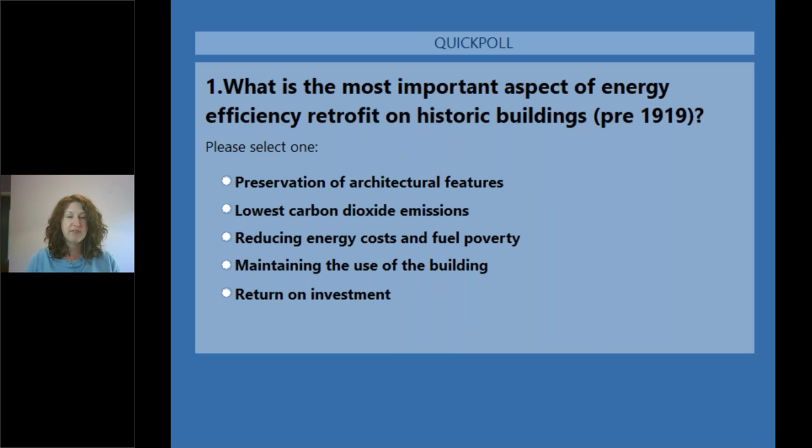Quite a split there. Preservation of architectural features is the highest there, maintaining the use of the building. And then reducing energy costs and fuel poverty, and return on investment is low. That's an interesting one to see there. I think that's something that depends very much on who's asking that question. So thank you for that there.

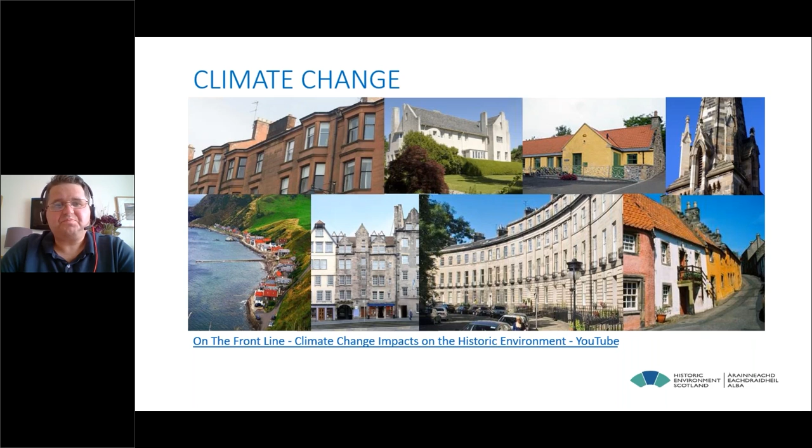Now, it's not just historic buildings or coastal sites that are affected by the threat of climate change. The entire built environment is too. The buildings we all own and live in, they're at risk. Buildings built today will deteriorate more quickly, and they'll require more frequent maintenance as our climate changes. So there is a need to make buildings more resilient in the face of this threat.

So it really brings us to why we're here today, and it's something that Lindsay probably touched on better than I am. We're talking about the need to repair, restore and retrofit our existing building stock. Now, Scottish Government have pledged a net zero target of greenhouse gas emissions by 2045. Now think about that, that's only 24 years away. So in 24 years, Scotland will or should be net zero, which means we won't be a net contributor to global CO2 emissions, which is great. But that's a big ask.

There are 2.3 million dwellings in Scotland, of which 455,000 or so, 19% you may say, were built before 1919. Now we refer to these as being traditionally constructed buildings. But this 19%, they've always been considered difficult to adapt, difficult to treat, and difficult to heat. But there's an urgent need to ensure that these existing buildings are part of the net zero solution and discussion. So now if we look at those 455,000 buildings, many of them are tenements, houses, flats, and retrofitting even a quarter of these buildings over the next 24 years will be a huge challenge.

Even if the financial resource was available to do it all now, there simply isn't the skills or physical resources available to do it at present levels. So I personally feel that this will become a huge growth sector in the next 25 years. And there is a big challenge in terms of ensuring the skills are available at both the professional and construction craft level. There needs to be a lot of upskilling, and retrofitting existing buildings needs to play a much bigger role in our education and training going forward if we are to realise net zero ambitions by 2045.

But before we go off and set about retrofitting 450,000 buildings, we must ensure that the external fabric of these existing buildings is in suitable condition to allow that retrofit to take place. Good maintenance is a prerequisite of energy efficiency.

Now, this is an image that, if any of you have been on a HES talk by Roger Curtis or Moses Jenkins within Historic Environment Scotland, you'll have seen many times before. The left-hand side of the image shows some of the potential issues that occur when a building is poorly maintained. And on the right, there are numerous interventions or repairs outlined to ensure that the fabric of the building is working. You can look at that in a bit more detail when you get more time.

But maintaining and repairing your building is probably the single most important thing you can do to improve its energy efficiency, and it should be a priority before any other improvements are considered. Buildings are more energy efficient when they are kept well. Loose, defective pointing, poorly maintained windows, damp masonry, these all reduce the thermal performance of the building fabric, contribute to heat loss and result in increased energy costs.

So historically, for our predecessors, maintenance of internal and external finishes was assumed. It was a part of living and working in a traditional building, I suppose. But is this incompatible with modern day living? Who has the time or money to keep on top of maintaining their property? It's a big ask, particularly when there are so many modern day distractions.

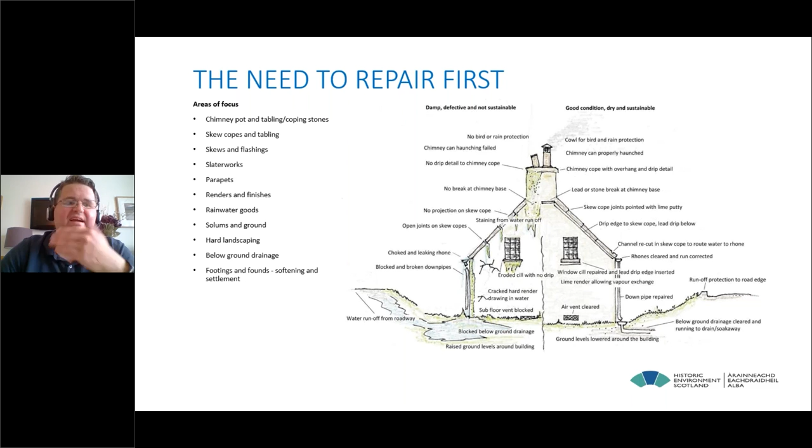So the takeaway from the talk today is to ensure that you deal with these issues before any thermal upgrading of the fabric takes place. Repairing and restoring the envelope is the first step in any retrofit project. And we'll just start by going down the areas of focus on the list on the left-hand side.

So chimneys. Chimneys are generally the most exposed element of a building, and by their nature they're typically hard to access. Consequently, they're often neglected. Not only are chimneys exposed to wind and rain, but flue gases and combustion products deposited within the masonry over decades can accelerate the decay of the stonework or the brickwork. And this is exacerbated particularly if the flues are no longer in use. Now, with the chimney cans, if you look at the image on the left-hand side, you'll see that the haunching washes out, it becomes cracked, pots become loose. This is not only dangerous, but it's something that probably needs to be fixed fairly urgently.

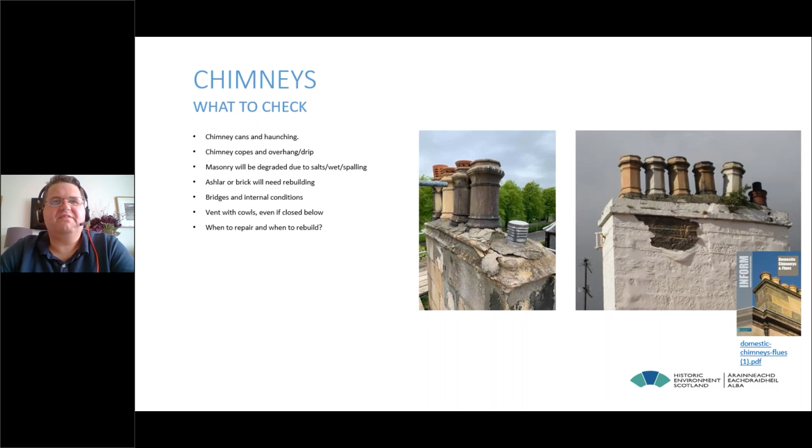You walk around Edinburgh and look up at some of these chimneys, and you just know from looking at them whether they're in a particularly great condition or not. You can see bits where things are growing out of them. So an important thing to look out for is the chimney copes. Is there enough of an overhang or drip? Is the masonry degraded due to salts, wetness, spalling? Does it need rebuilding? In any case, it's likely a chimney will need rebuilt every 100 years or so, but it's a problem area, and this is really the first thing when you approach a building, looking from the top down.

As we come down the building, you'll see things like skew copes. These also face a high level of exposure. They're hard to access, defects can go unnoticed, and if left unattended, these can often become critical. These are there to protect the head of the wall. And if these don't work, they can lead to progressive saturation of the gables, resulting in damage to the interiors as well as the exterior. This also has a big impact on the thermal performance of the building. As we mentioned earlier, if the wall is wet, it's not going to perform as well thermally.

So there's a number of measures outlined there that can be used. You can cloak or half cloak the skew cope. That's an option, but in my opinion it does detract from the appearance slightly. In some cases, the skew copes can be rebedded onto a lead damp-proof course, which provides extra protection against water ingress. If this approach is taken, the copes will need to be secured in place with additional fixings to avoid slippage, and the edges of the damp-proof courses should extend out by about 2 inches or so, just to give a good drip to shed water. But in many cases, just a good margin and a drip detail to shed the water is enough, and that's probably a preferable solution.

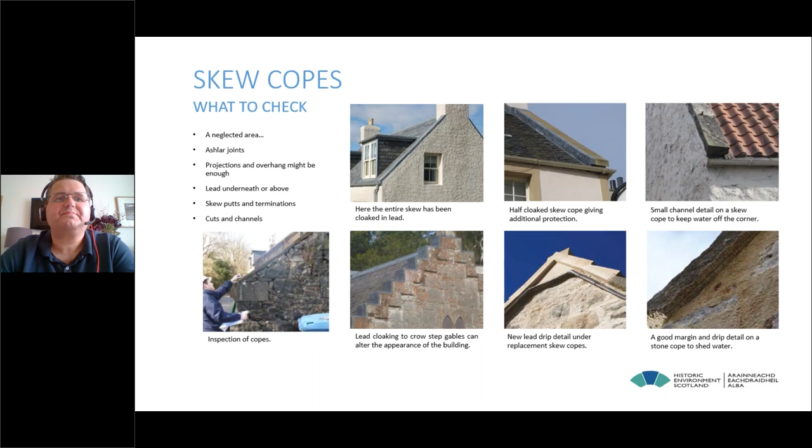And then we sort of come on to these parts of buildings, the parapet gutters. Now, these are a great trap for debris to build up. They're tricky to detail, and they do need a wee bit of thought. These can cause massive problems if left alone. So it's really important to regularly inspect them, clear them out.

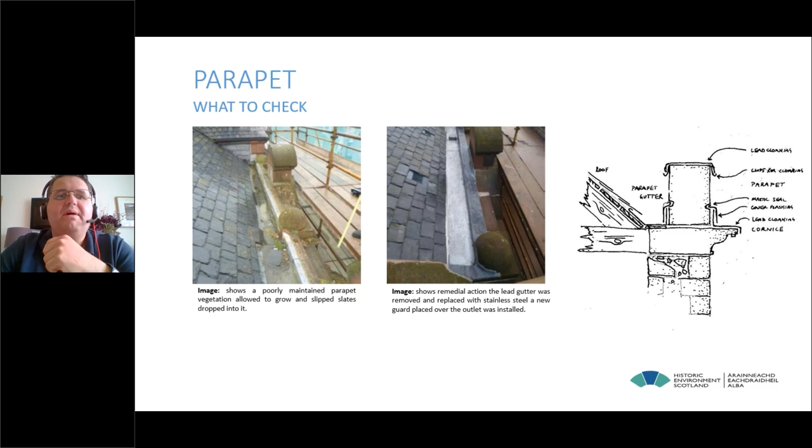So you see on the left-hand side, the image, there's ponding, there's a slate sitting in the gutter. It's clearly not been looked after for a while. Now, the intervention on the right-hand side was to install a new stainless steel gutter. The lead work was carried over the parapet, and a bird guard was installed over the outlet to stop debris falling down the pipe. But that's the repair of it sorted. But if it's not looked after, these problems will come back again.

Sort of moving down the building, we're onto roofs where many Scottish buildings have got roofs that are covered in a local stone or slate. Now, these small, thick Scottish slates were produced from a range of local quarries across Scotland. The material was processed and produced in a variety of lengths and widths, and it was laid in diminishing courses, with the largest slates at the bottom of the roof, diminishing to smaller slates towards the top.

Now, slates have got a finite life, but we know that this is a really robust material. The material will last for well over 100 years, which is quite common, but depending on the type of slate and the quality of fixings and how the material has been laid. So we really are reliant on the craftspeople to help us understand these roofs. But similarly, regular repair is the best way to ensure that roof coverings will remain watertight and continue to perform well.

So what you really want to be checking is damaged, loose, missing slates. The amount of water that can enter by a single missing slate is fairly limited, but it's the local decay of the sarking board that will follow that will lead to further loss of slates. So generally an annual inspection and repair is sufficient. Other things to do is just check the flashings are clear of debris, valley gutters and things like that. There's no bits of slate or cement in there.

Go into the roof space, check the fixings. Are they in good condition? Is there condensation on them? Is there moisture in the back of the sarking? Check for leaks in the roof. It may not be obvious from looking outside where there's problems, but if you go into the roof space, you'll get a better idea.

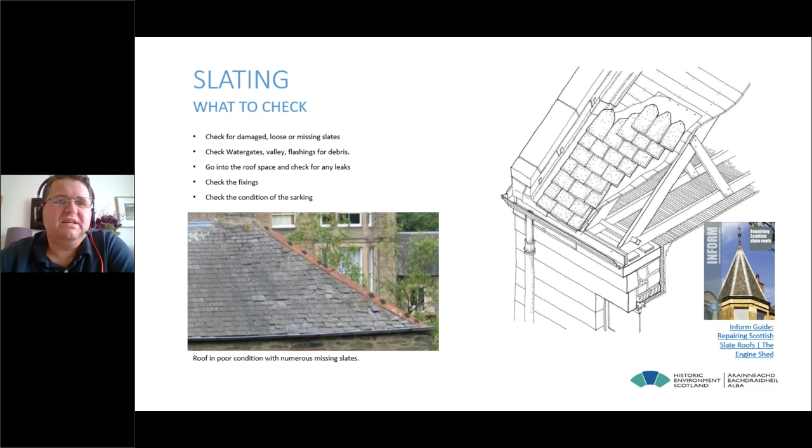And it simply just does come to a point. You'll see from the image there where there's quite a number of missing slates, and you might find that fixing these individual slates is no longer cost effective, so reslating may be required. Now, as a general rule, if you're talking more than 20-25% of slates are cracked, broken or missing, it may be more practical to just strip and re-roof the building. And I would suggest using an NFRC approved roofing contractor if you're going to go down this route.

But there's something quite beautiful about a slate roof. I much prefer the lively tones of a traditional Scottish roof than the modern homogeneous roofing slates that we are importing today. We've got plenty of these roofs around, but they are being lost at a fairly substantial rate. The material hasn't been produced in Scotland since the 1960s, so we are relying on imported material, which to me just doesn't have the same appearance. It's not quite as rough or as lively.

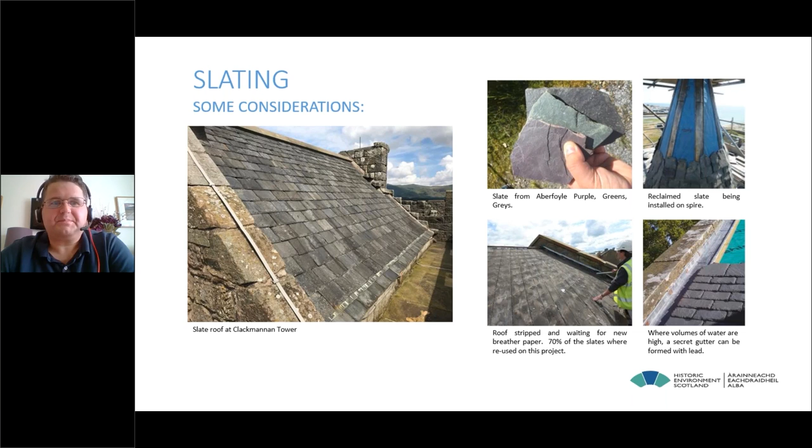So for us, the best way to maintain and preserve these roofs is just regular maintenance, again, a sort of annual one. You just go up and have a look at your roof through binoculars, and just sort of bring somebody out to repair it.

We get on to roans and gutters, and these are a really important part of the building because they're the thing that carries rainwater from the roof, ensuring that the wall fabric remains dry. If they get blocked, they can cause a huge amount of problems with high volumes of water saturating the building fabric. This is a serious matter - if not addressed promptly, it will result in damage to the masonry and finishes.

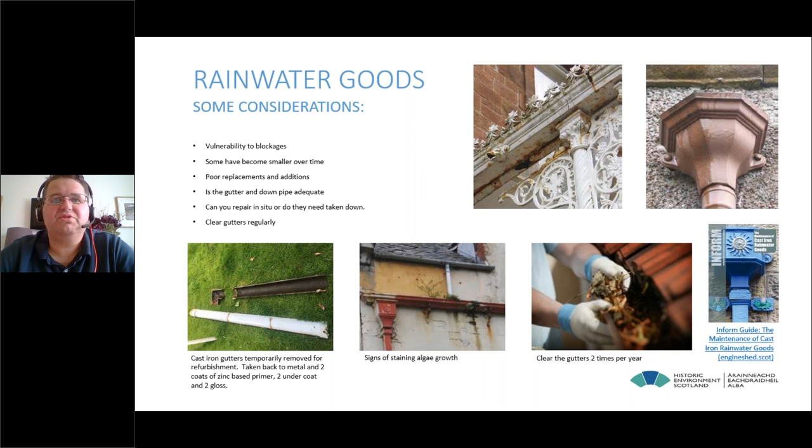Look after your gutters and they'll look after you. Cast iron rainwater goods will last several lifetimes if looked after and maintained. They do get brittle, but I took my own ones down last year, two sections at a time, and it took me about 6 months all told.

You've just got to accept that moisture is part of managing an existing building, and it's how we manage the movement of moisture out of the building and out of the walls that's particularly important. So we've got to ensure that the materials that are there can breathe - they allow for water to be absorbed and then released. Any intervention here really needs to be thought through, as it will impact the point where moisture condenses within the wall buildup. I'd advocate that a really good understanding of how these walls work is a necessity before you think about undertaking any retrofit measures.

If you install a layer of insulation on the back of that masonry wall, it will make the back of that wall colder, which will bring the dew point further into the wall, which can cause further problems. But to address any damp problem, the source of moisture must first be identified and addressed before any interventions are considered.

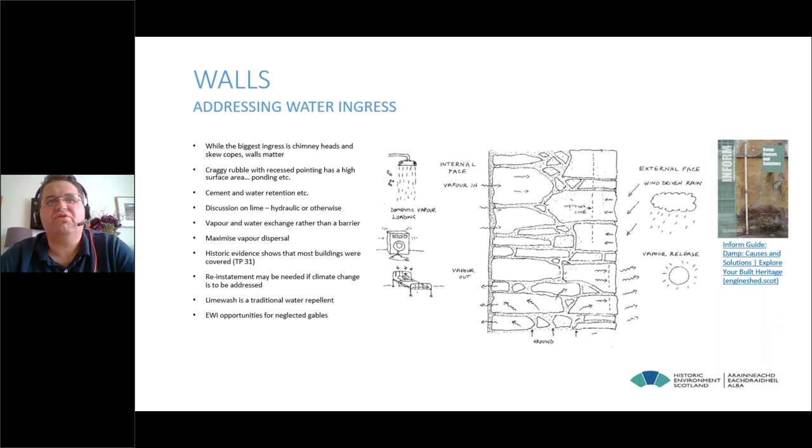The other thing I would advocate is like-for-like repairs. So anything you're doing to a stone wall, you need to make sure that the materials are compatible with what's already there - we'll touch on that a bit later on.

And that brings us to the question we've been thinking about: to Harl or not to Harl. There's a lot of evidence to suggest there was a lot more masonry Harl traditionally than maybe we would think. Lime Harl and lime washing make these buildings much more resilient to extreme weather. But how do you balance that practical solution with the fact that you're fundamentally changing the appearance of the building by installing a lime Harl on a stone building? A lot of buildings maybe had this Harl and it just became fashion for stone to be exposed. So it begs the question: do we need to go back to lime Harling?

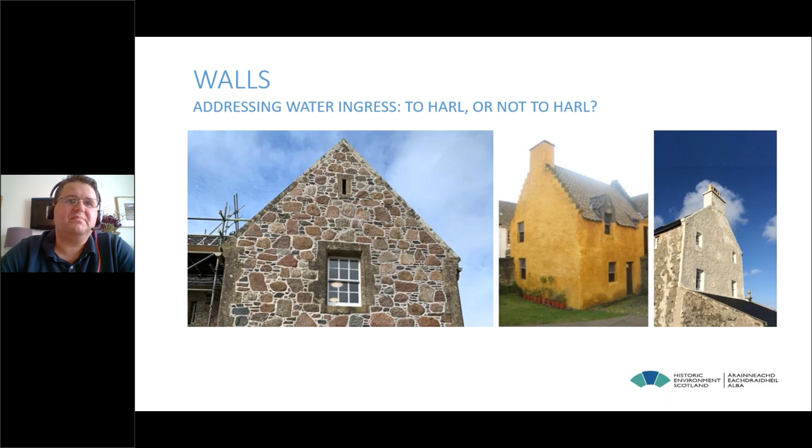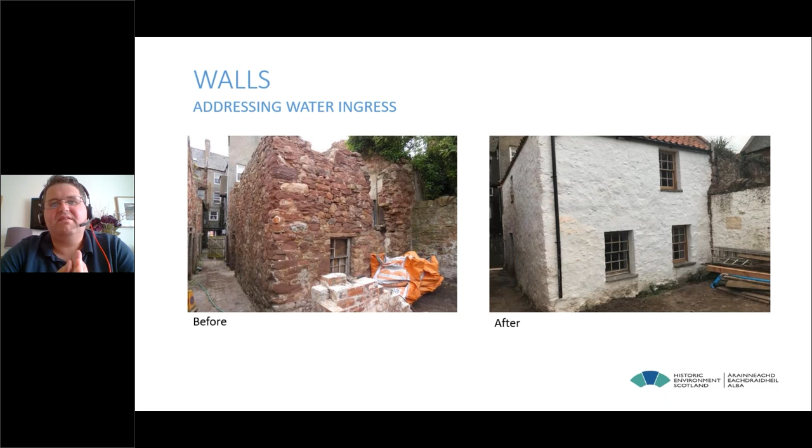If it makes the building more durable, it enhances the building visually, then perhaps why not? It's a technical solution. If it keeps our walls dry and it ensures the survival of the building, maybe we should consider it. And this is just a sort of example. It's the same issue with building stone. Maybe this isn't a particularly attractive stone building, but I don't think the lime harl detracts from the appearance. I think it actually enhances it, and it's also offering a greater degree of protection.

We're starting to get our way down to the very bottom of the buildings, and you'll see a lot of traditionally constructed buildings have got timber floors and they rely on a vented solum. It's very important to make sure that there's adequate air movement beneath these floors, just to disperse water. And I've come across this in projects where I've seen so many of these vents covered, or the ground has been taken up right up to them, which isn't ideal.

So I think it's important to think about the ground level. Has it been adapted? Should it be reduced? It may be practical to install a French drain there just to allow a wee bit more drainage, to allow that to move moisture away.

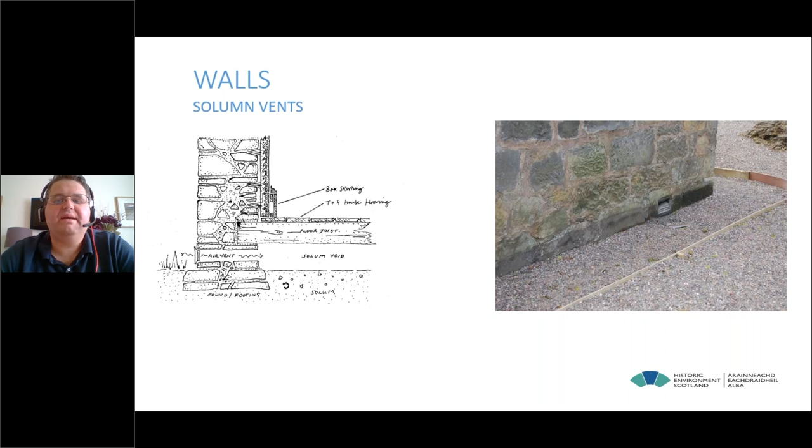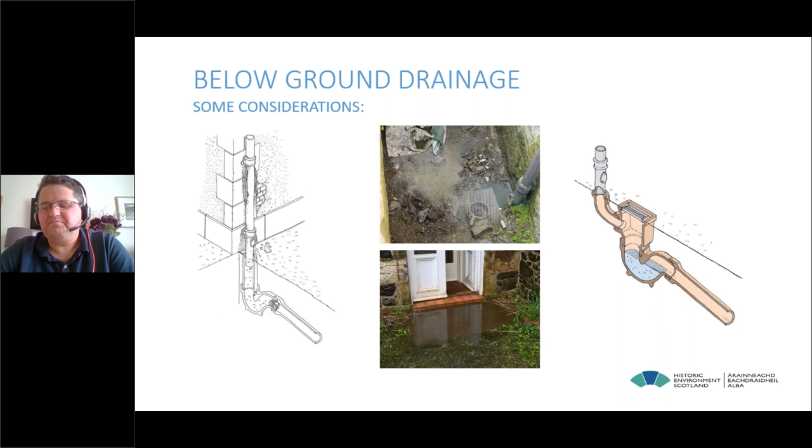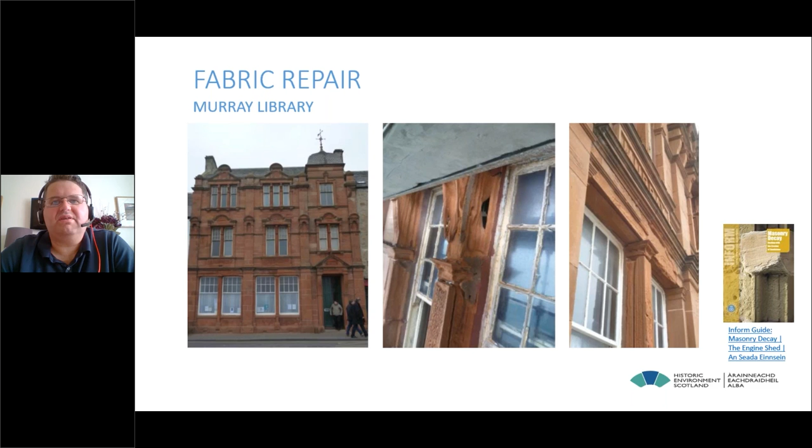You can't necessarily always see them from the ground, but this is a site that's on the seafront, so it does get quite a bit of salt spray from the beach. So obviously there's a risk that some of the stone could delaminate and fall onto the public, which is something that we had to fix. So we had to repair the masonry.

The approach was we brought in the British Geological Survey to take a sample of the existing masonry away and do a petrographic analysis. They provided us with a couple of potential solutions, and I think it was Corncockle or Locharbriggs that was used in the end. And you'll see in the image on the left-hand side, the interventions are fairly clear to see.

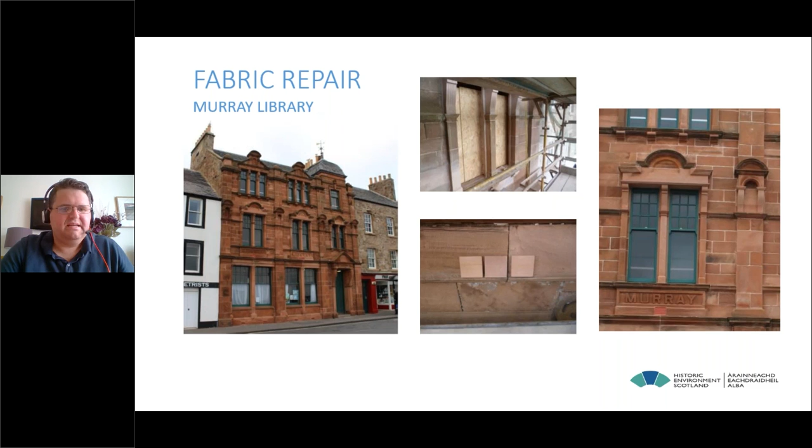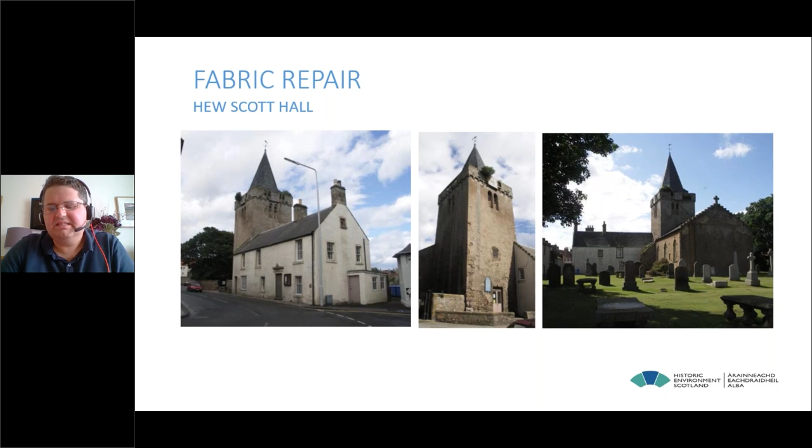The town hall on the image on the left has got a cement render on it, and the roof was in fairly poor condition. So the further we went up the building, the more problems we got to see, which was because it was more exposed, I suppose.

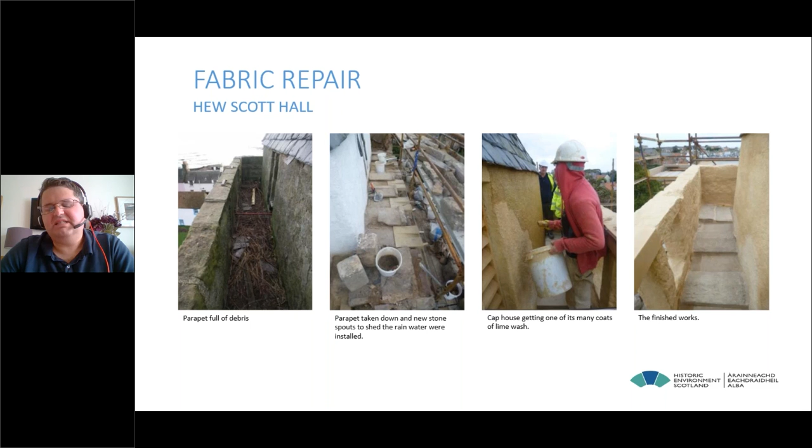What we had to do as part of this 100-year repair was to clear the parapet and basically take it down, install new stone spouts, and rebuild it again. The cap house was given a lime harl and several coats of lime wash, and that's the finished parapet on the right-hand side. That intervention will help that building shed water. It deals with the defects of the eroded stone spouts, and that's it today.

This is your typical 100-year repair. So that building now, I would argue, is ready for a retrofit. You've dealt with the problems of the fabric. Now you're ready to do a more deep retrofit on it.

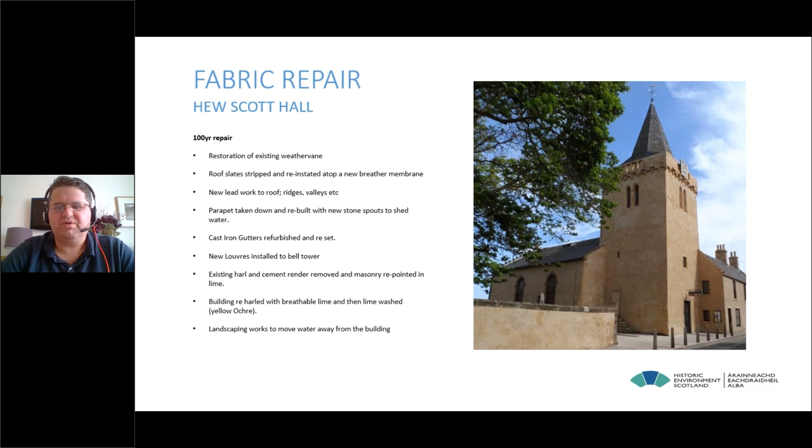I'm just aware of time. How am I for time? Just 2 minutes left, Graham. Thank you. Okay. So, sorry.

So this is a wee project in Kilmany. You look at that and you think, who in the right mind would take that on? But it was a great wee project.

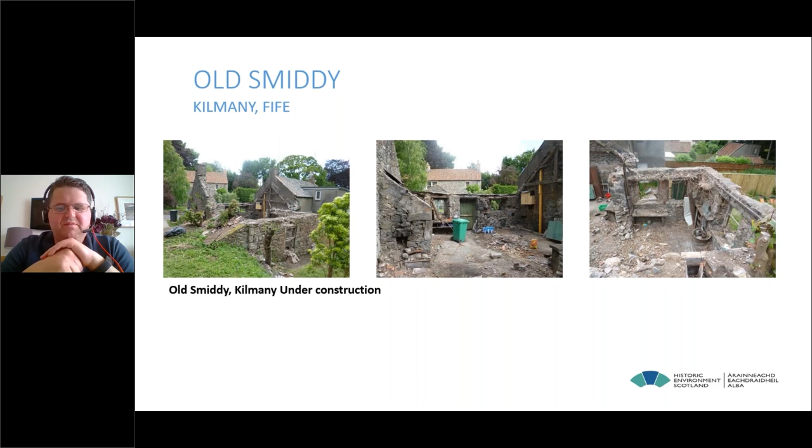There's a lot of character with that building, but you'll see that fabric was in extremely poor condition. It had been neglected for a number of years. The roof had to be taken off, but this gave us an opportunity to do a more deep and considered retrofit. We were back to sort of the very basics of the building, and that's it today. So it's now a home for somebody.

So I'm just going to run through very quickly the last slides. So just what to do: careful, proportionate details, compatible in scale and craft to existing work, enhancement of performance, use an established palette of materials and techniques. Solutions in a tin are not our thing. Each building assessed on its merit.

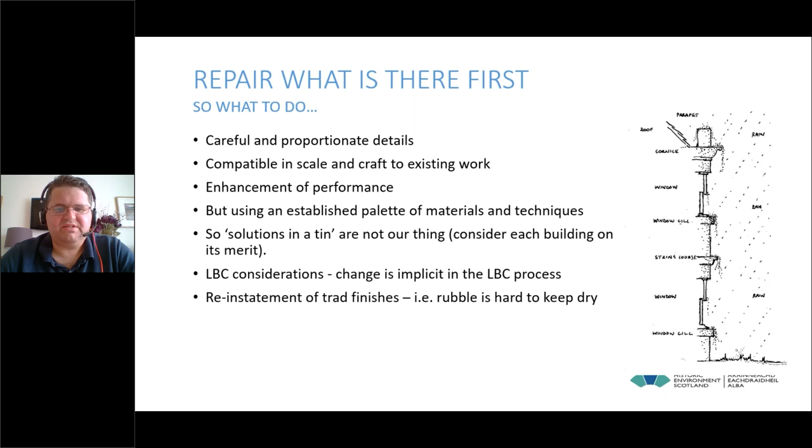Listed building consideration, changes implicit in the listed building process, and reinstatement of traditional finishes. Rubble's hard to keep dry, maybe think about what we can do there. Oh sorry, I went the wrong way.

And it's just really my final thought. Most of us will have different job roles throughout our career, and I would imagine that most architectural technologists at some points in their career will encounter working with an existing building, either adapting it or extending it. I think architectural technologists are well placed to play a leading role in retrofitting traditional buildings, but we have to look at the buildings differently. These need to be part of the solution to climate change and not the problem.

And it's important to have a good understanding around the issues, particularly around traditionally built structures. Understand the intervention you're proposing and the impact it will have on the existing fabric. Is it appropriate? Is it suitable? And always just fix what's there first. That's my sort of final thought.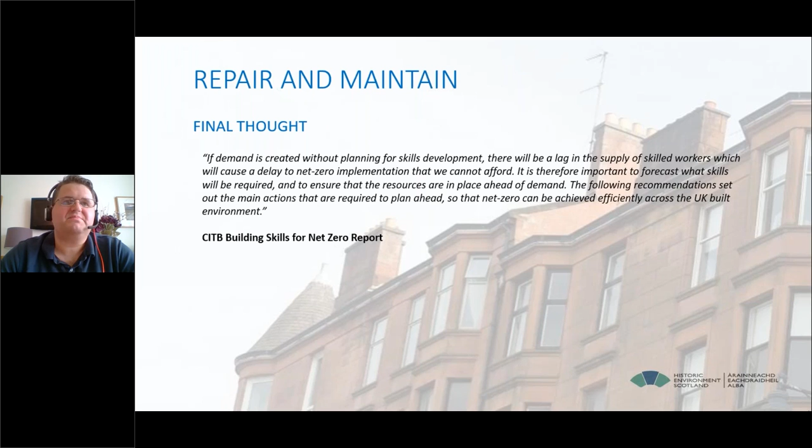And there are a wide range of publications from HES available on the Engine Shed website, and there'll be some links disseminated to you later on, but it's probably easier to find them on the website. Okay, thank you.

That was brilliant. Thank you, Graham. Really brought that to life as well. Really fascinating to hear, and the transformation in the old smithy is quite something. Yeah, I was aware that at the time I wanted to kind of run through it a wee bit quicker. So, that's really great to see. So thank you for that.

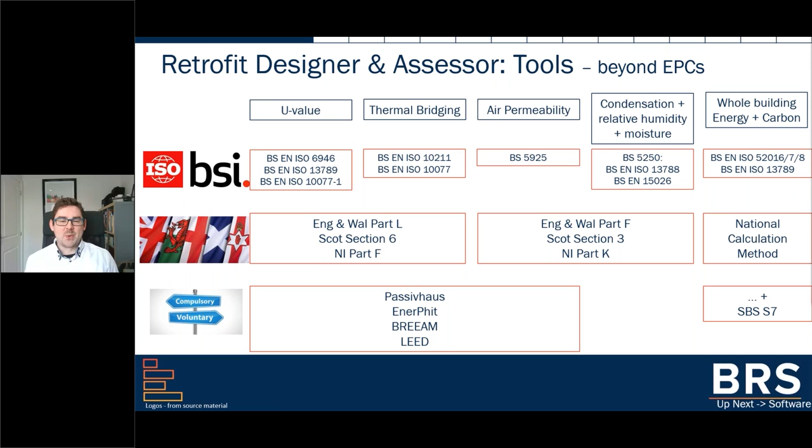Now, we also have various voluntary methodologies and approaches and standards, which include the Scottish Building Standards, Section 7 of the Scottish Building Regulations. Now, whilst I appreciate that's for new build, there are takeaways from that which can be retrofitted into a retrofit project that allow you to go beyond RdSAP and SBEM.

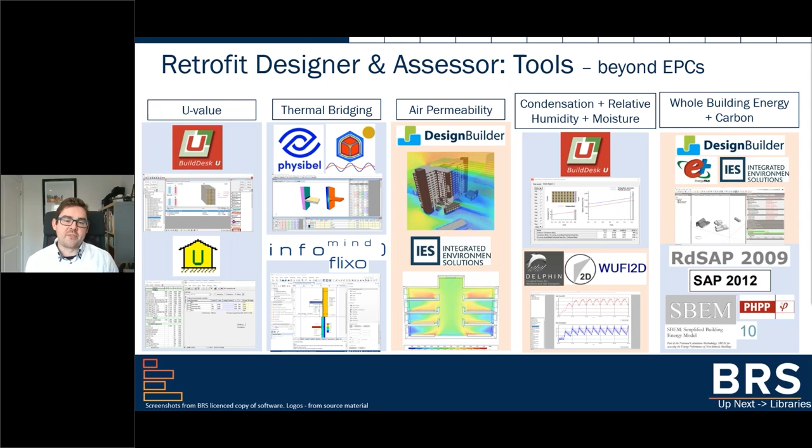Not least because the dynamic energy modeling software also gives you daylight results and daylight factors, but importantly, they also give you thermal comfort values using the Fanger methodologies, which I'm going to speak about in the human factors side of this particular presentation.

But now for a word of caution with all these softwares and tools. And this is a message for designers and assessors of energy efficiency retrofit works. The more complex and dynamic modeling software with capacity to simulate over many years using hourly weather files and climate data, they are not always better than your simpler numerical steady state stuff. Now, in many ways, they are better, but without the right input data in the form of libraries, using dynamic software can be simply worse than useless.

Because if you don't have the right input values and you're using proxy materials and proxy locations, then your uncertainty and your margin of error for these outputs will be huge. And some of the numbers you're using to help de-risk will be misleading. So if you are investing in dynamic software or people doing dynamic simulations for you to de-risk a project, local libraries are key and must be linked to your specific location and supply chain. And using proxy materials does not de-risk your project.

It can increase it. So for us, it is quite scary at the moment, with all the talk around design for retrofit, just how many training courses are extolling the virtues of the software without doing proper due diligence on which software have, by default, weather files and materials from the UK.

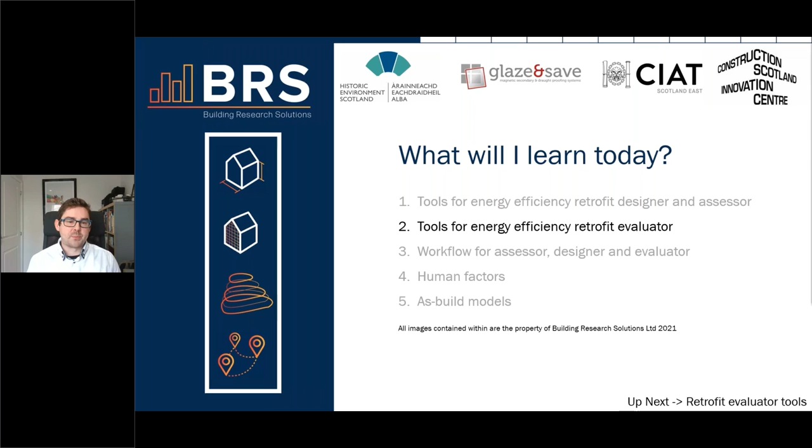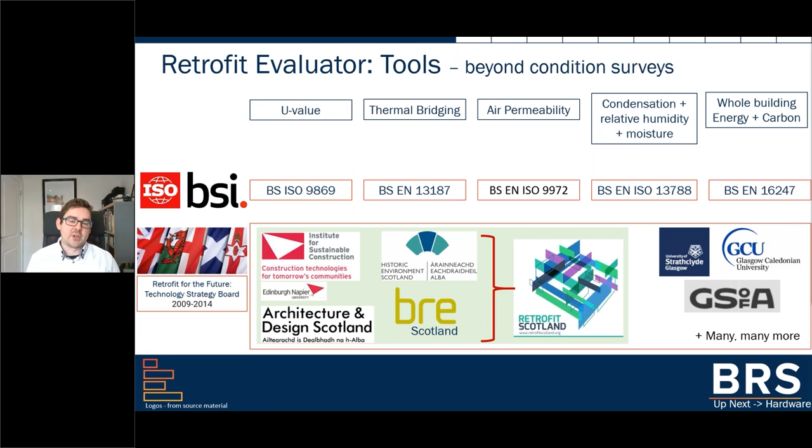Now, importantly, and regardless of what training course a person went on or the variety of calculation or qualifications they have, you need to ensure that the monitoring and measurements are being carried out to a relevant BS EN and ISO standard. That's key. And in instances where the standard doesn't exist, a person's experience and scope of their methodology must be checked and must be challenged.

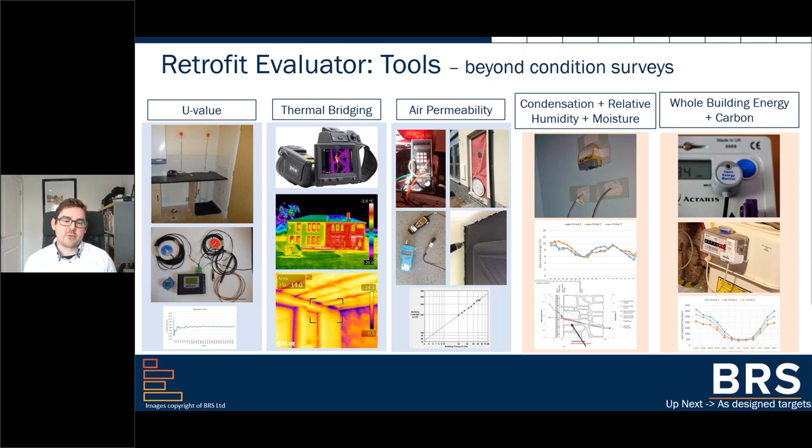Now, another cautionary message for those who want to evaluate an energy efficiency retrofit project. Replicability and comparability are paramount for what you're going to be capturing and evaluating. This includes the calibration of your own equipment, placement of the sensors, the error and precision of the readings, the sampling rate, etc. So with or without a BS EN and ISO standard, the monitoring regime must be consistent and robust to cater for a range of archetypes that you are and will be working with in the future.

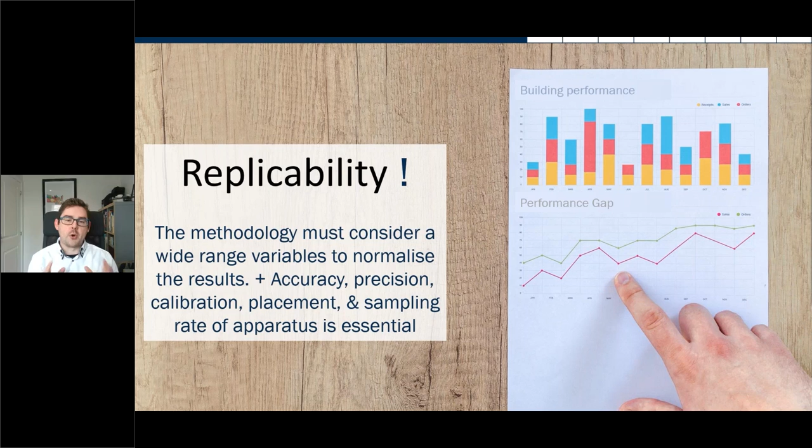And without that integrity, the benchmarks and databases that you want to create will be flawed, and you will be increasing the risk there. So it's very important with evaluation hardware that you have a consistent standard, either a national standard or your own in-house standard, so that your data can be comparable.

Then using the in situ baseline data as input variables to your assessment software allows you to calibrate your models. So even if you're using the steady state stuff, the in situ data that you capture will help you to increase the accuracy of your results and can reduce that risk and the error in your assessment. Then after the retrofit works are completed, you repeat your evaluation. This means you have 3 data sets, and you can then performance evaluate your work. But also, somewhat more importantly, it helps you define those benchmarks and those libraries to help de-risk the next project.

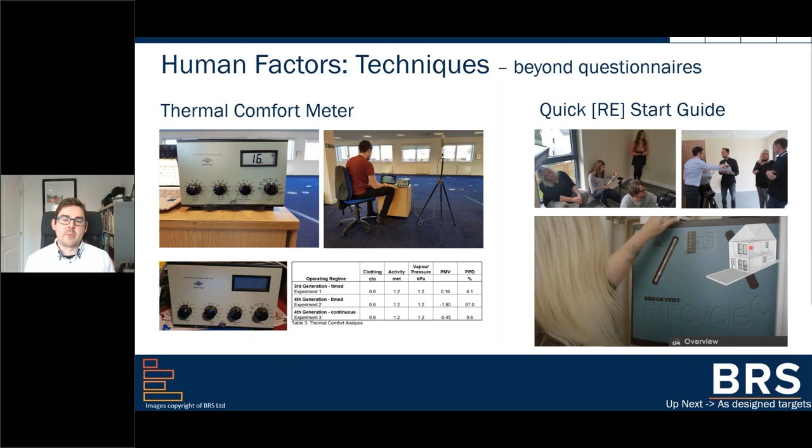So issues such as overheating, changing control points to regulate thermal comfort are considerable issues that can often plague a good retrofit project. And if not looked at correctly during the post-retrofit evaluation, those sorts of values can skew your results to show that the retrofit was not successful when in reality it may very much have been.

Finally, last slide here, a little look to the future in terms of other tools that we can be using to help us in the quest towards achieving some of our energy efficiency retrofit targets. Now, we're all becoming very familiar with terms such as design for manufacture and design for assembly and design for retrofit and design for deconstruction. And we and others are experimenting with equipment to produce as-built photogrammetry models and LiDAR scanning to produce point cloud models for what we're calling design for mass retrofit. Now, these are especially useful when undertaking large-scale retrofit projects with lots of repeatability.

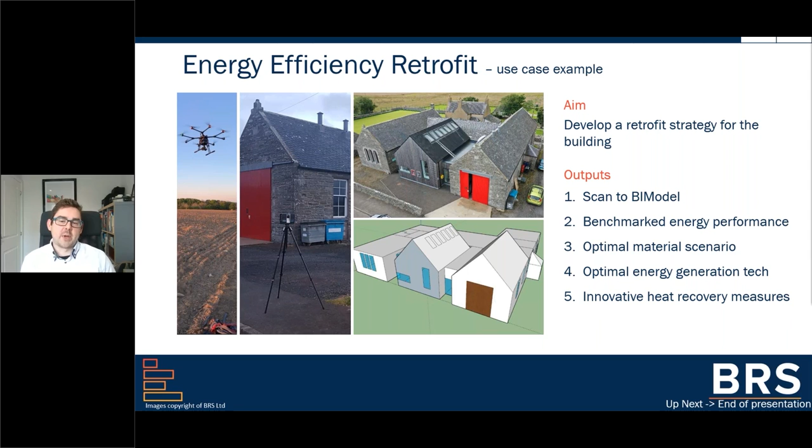And then all of a sudden, some of the large and clunky retrofit jobs can start to be optimized, meaning that many of the first and second cuts for material sizing can be done before it gets anywhere near the person's house or home or building. Now, whilst we'll never fully move a retrofit project to being fully off-site, there are easy wins here. Reduced travel, reduced moving materials around the country, reduced visits to the property, reduced disruption, reduced decanting, and importantly, reducing cost, time, and wasting of materials.

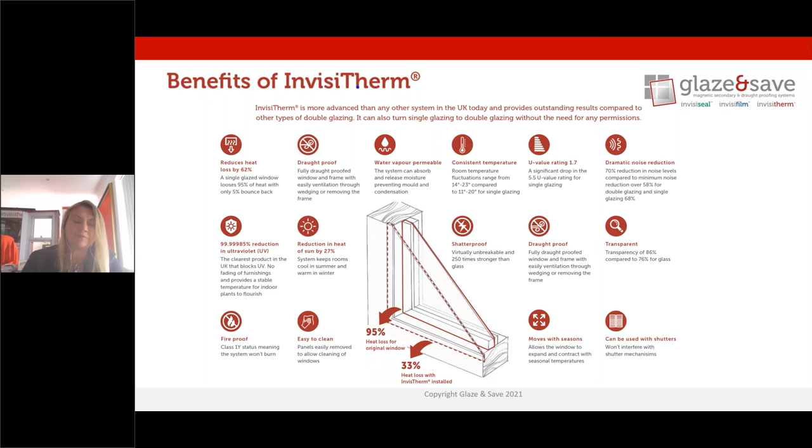There's also other clever things, such as it stops the ultraviolet coming through, so there's no fading anymore. And the noise reduction performance is outstanding. We feel it's on par with acoustic glass. And we find a lot of our business is over double glazing as well, which we hadn't anticipated when we first started. And it's also fireproof, and I think we know how important that is nowadays. It's also breathable, it's water vapour permeable, and I'm going to talk about that in a little more detail further on the slides.

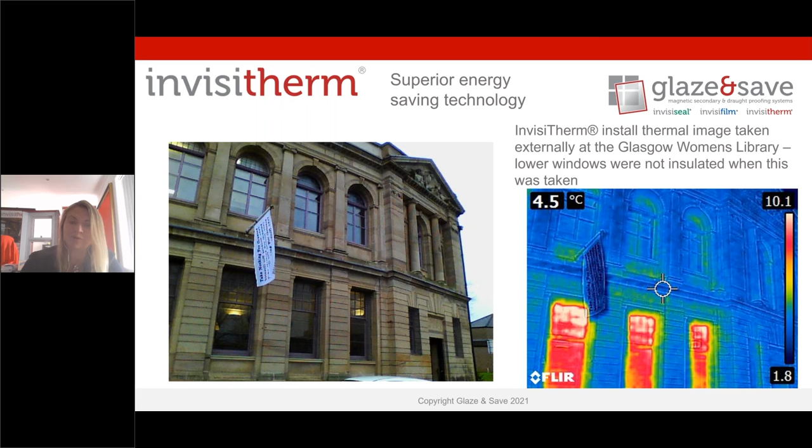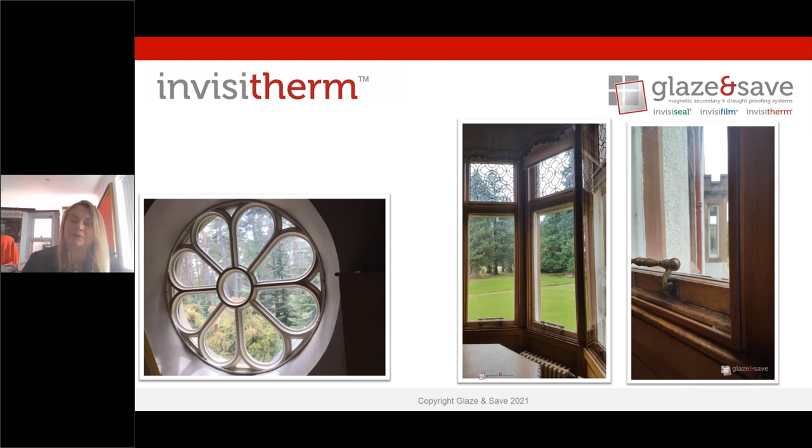And here are some examples of our installs. So this is working with shutters, discreet inside-the-frame installs, working with shaped windows, working with wood windows where we do colour matching. We enable the ironmongery to stay in place. Same with Slimplex systems, allowing the windows to be easily opened, such as our easy access systems, and we can do any shape, any size basically.

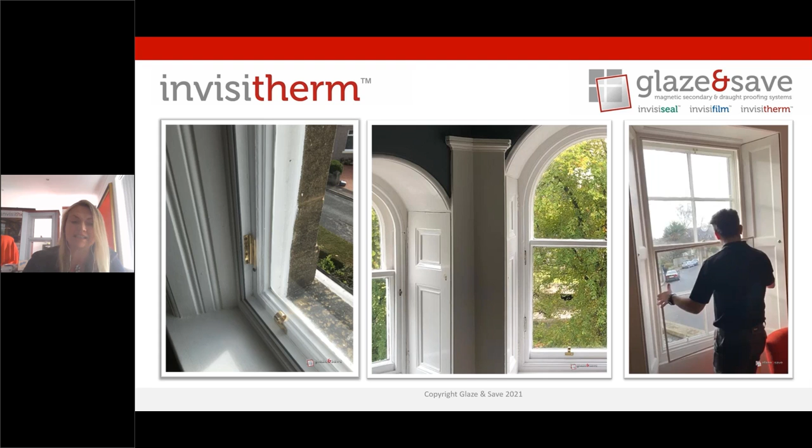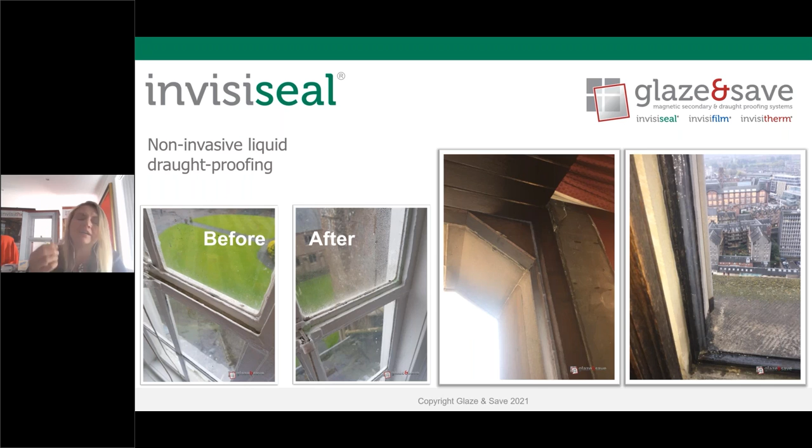So our free survey process has been a real challenge for us as a business, and it's good for me as a business leader to chat to you today and give you another perspective on it. It's actually trying to make a company in this market, and how do we retrofit, and all the challenges. So we now have to do a survey in 5 parts.

A window survey to actually work out where Invisitherm would sit and work out a price. The window health check to see 17 points of a window, a typical sash and case window, to check that it is in a good state, and if not, what advice we would give.

The systems presentation is just so the client actually understands Invisitherm, sees it, holds it for themselves, and thermal image survey to actually have a look at any thermal bridging and problems that may occur, and then property condition survey. And this is really due now because of the climate impact. We never used to do the latter two initially, and we're having to now because of the conditions that we're now facing, which I will show you in some of our case studies.

So what we do when we educate our clients, and we have to educate the clients, it's not a case of they're just buying from us, is we talk about U values and we explain the thermal transmission of the U value. With the U value, we talk about the radiant surfaces, the temperature, the increased thermal comfort that we can then achieve, and it gets them to understand what their house is all about. And we really do get engagement from them.

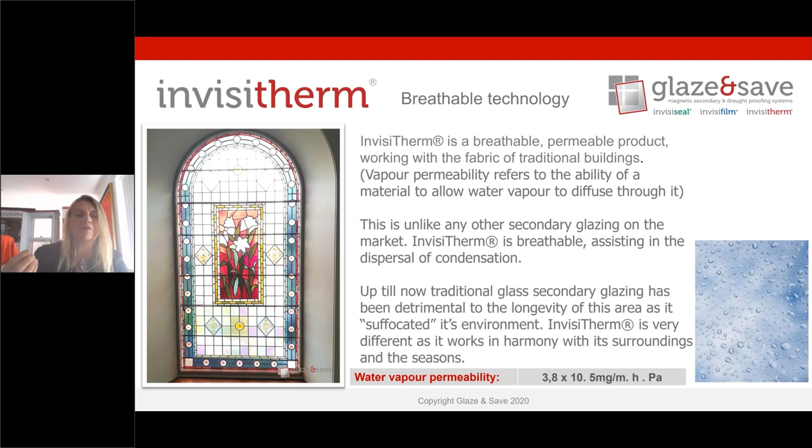So we also talk to the customer about ventilation and air quality, and we explain the traditional build air movement and modern pollution challenges such as traffic canyons. Now, with the condensation and relative humidity, we also loan a free dehumidifier to any of our customers for 3 months so that they can engage with the moisture levels in the home.

We are finding, especially in the last 3 to 4 years, that our clients are coming to us and saying that we're freezing. We've never felt this cold before in our home. Our heating hasn't changed. We haven't changed. And what it is, the moisture levels within the house have been getting higher and higher. So I would love anybody out there that wants to help us to do some more research on this, because there's something going on. And the vast majority of our clients buy the dehumidifiers from us because they find that they need to reduce the levels of moisture within the home.

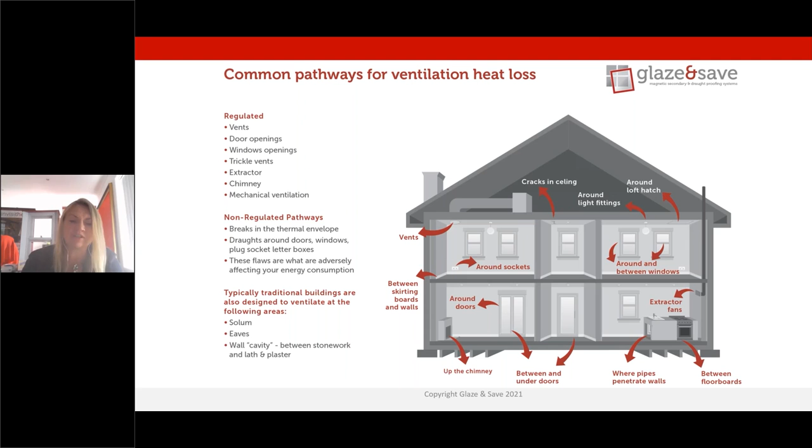We also share ventilation and heat loss information. So this is a plan that we share with our potential clients about all the different ways that the air can come into their home so that they can understand the airflow, because it's really important to make sure that that is maintained during any retrofit that's going on. And we also look at the energy performance certificate, and we make recommendations on whole house retrofit and not just our product. If the loft insulation hasn't been carried out, for example, that really has to be done first before the windows or in conjunction with that, as one example.

Scottish Government funding is available and we let our clients know how they can apply. And right now, Zero Waste Scotland for commercial buildings has a 30% grant on our product, which is fantastic. And we also demystify the energy savings.

Now, this is my background prior to taking on Glaze & Save. I've talked about this for many years and the stages that you need to go through in order to achieve net zero or a path to energy saving. There's a behavioural change, which is well documented, and I know John Simpson knows an awful lot about this area. Low cost, easy solutions, which are simple.

Behavioural change, by the way, is just simple things like closing the curtains an hour before it gets dark. It can actually keep 2 degrees in the house. Moving your headboard from an external wall into the room, or changing the setup of the room. They don't cost anything, but they actually can improve the thermal comfort and your overall utility consumption. Your low-cost solutions are simple things like radiator reflectors, some draught proofing within the house around exit doors.

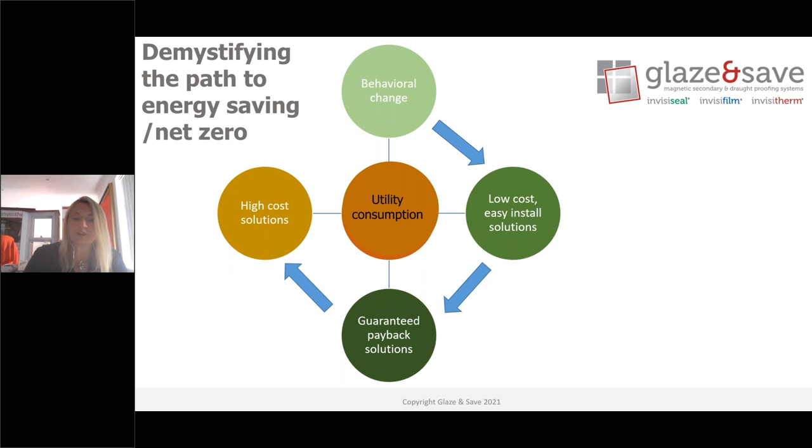And then you move on to guaranteed payback solutions, and then you look at the high-cost solutions. The guaranteed payback, the InvisiTherm comes in under that. Over a period of time, the product will pay for itself. High-cost solutions are things like air source, ground source, that have a much higher output.

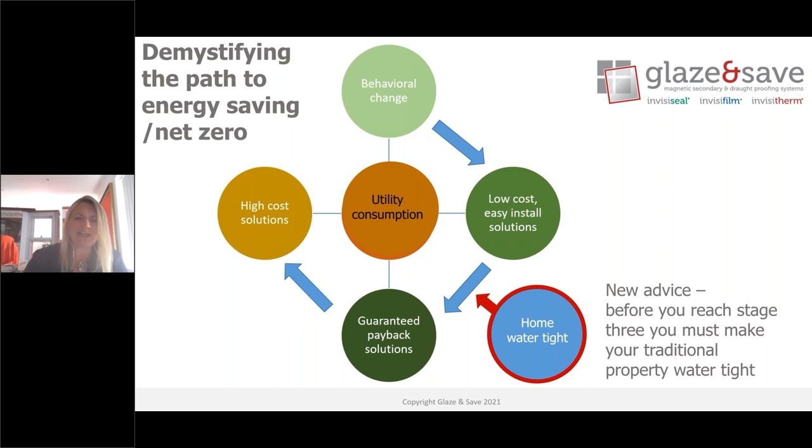Now, we've added this in. The home must now be watertight before you go to the stage that we're now wanting to install. And this is new advice that we're now sharing, and this is why I'm speaking to you today, to share why we're saying this. As Graham alluded to, climate change is here and now and happening, with a dramatic effect. We are seeing a lot of gutters that are just not able to cope with the water that's coming down. The downpipes are blocked or simply not big enough. The water is overflowing and hitting onto the windows and having a big impact on the condition of the windowsills.

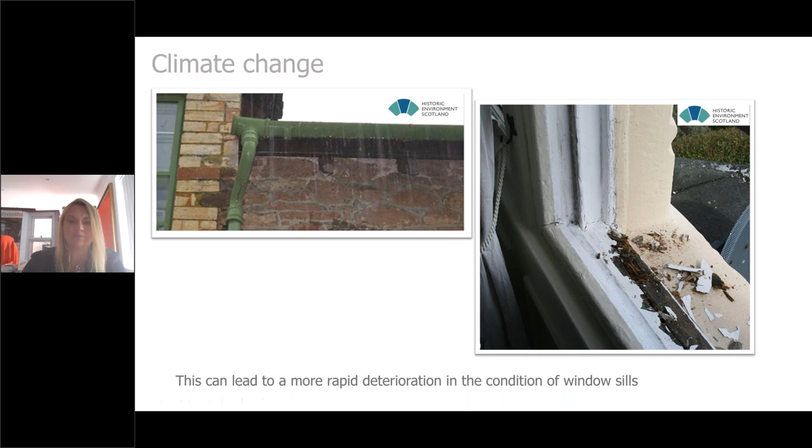Now, here are some case studies to show exactly what we're seeing. It might shock you, these case studies that I have chosen are simply from the last 2 to 2.5 weeks. I can replicate this hundreds of times over, and this is the sad case that we're now facing.

Now, this property is owned by a lady who's in the construction industry, so very switched on. When she purchased the property, she had her windows restored, and she's got the property in a very high standard. As you can see, looking at it, this is the ground floor here, and it looks fantastic condition. However, on closer inspection, you can see that the stones are suffocating the stone wall. And the water now is rising to the level of the window, and the windows are really soft. They look great, but you go up to them and your fingers just sink in them. And you can see here, unfortunately, the sandstone is starting to come away as well at the window level.

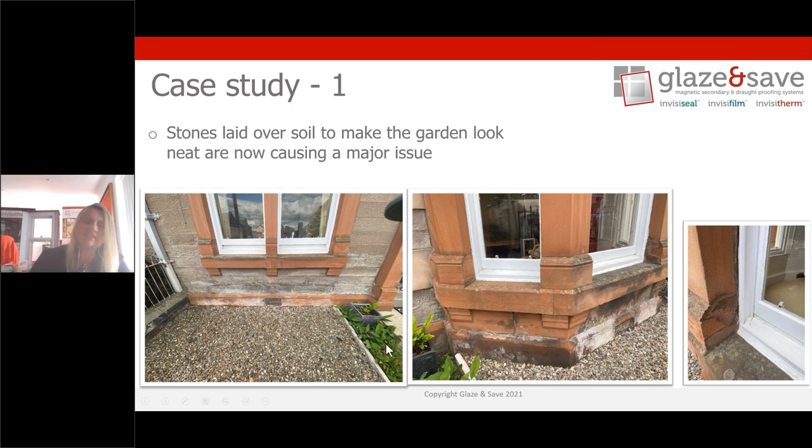Now, this property owner was not aware of this at all until we pointed it out. And again, this is in the same town, the suffocation here in the pavement by the council. I spoke to the window restorer, who I hold in very high regard, who's actually replacing one of these sills in the next 2 to 3 weeks, and asked him what he thought about this. He was absolutely shocked to understand where the actual source of the moisture had come from. He doesn't ever actually advise the client to get their gutter fixed — he'll just fix the actual problem and not the source of the issue.

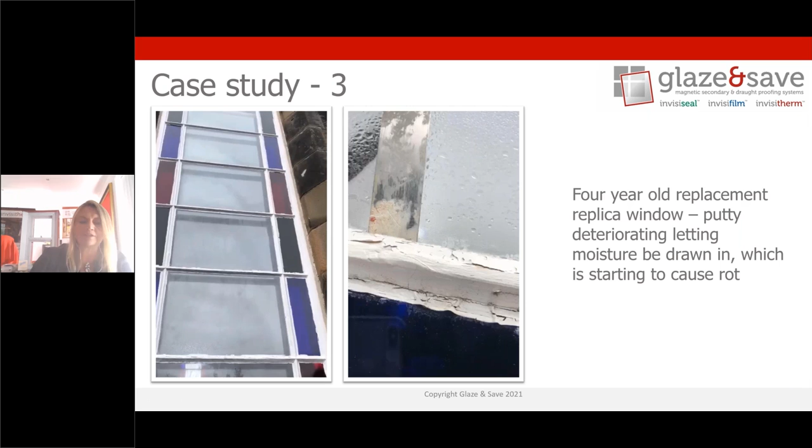Another case study here, and this is a 5-year-old hardwood window. It doesn't look too bad — it looks like it just needs a good paint. But on closer inspection, we found that there is really, really bad rot. And if you look above, you can see just a small drip that must be hitting the window every so often, and it's causing the problem.

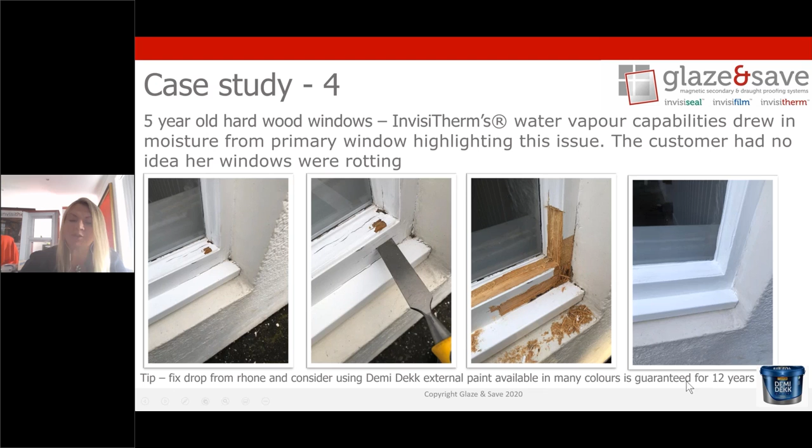But the good news is you can see that you can patch repair this, and apart from fixing the rhone to stop it from happening again, you can also use long life external paints like Demidekk that will give you a guaranteed 12 years. So they don't have to be a burden in the future.

Now, this home was purchased last year at well over £1 million, and the homeowner was given more or less a clean bill of health and told that the house was wind and watertight. Now, you can see from my very brief inspection that that's not the case, and the stone was already starting to get damp around the bay, and the vents had been suffocated through some gravel being laid over the top of the original earth. And on the side of the house, I found with my thermal image a very damp patch, and it's very evident when you take a step back.

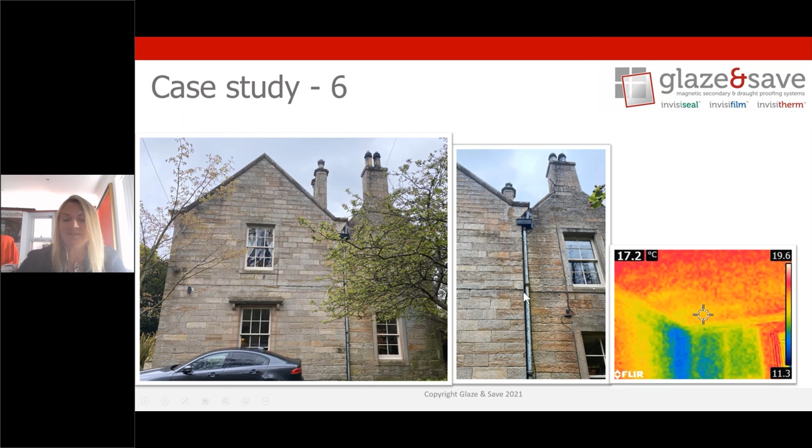You can see that this rone and this downpipe is all blocked. And yeah, it's quite frightening. And this is the side of the house. Now, he was aware of this because he was told this room had slight damp, but he was told just to cut back the trees, and nobody actually noticed that the ground level is getting higher and higher. And also that downpipe that I talked about doesn't quite go in properly. This all should really be changed. And you can see that the bounce back is actually starting to erode all the stone around this area.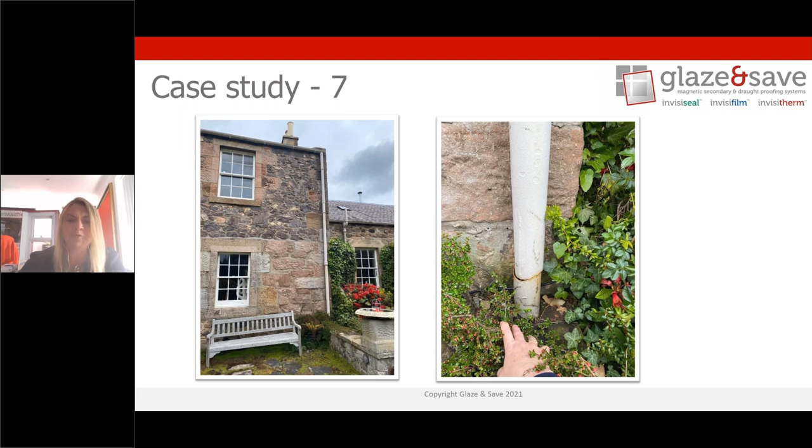And then the most shocking one of all is this is their main downpipe. It's not even functioning properly, and all this moss is caused by the water that's gushing from this. It's been soaking into the property, and luckily it's not at the window level yet, but it is having an impact on the thermal comfort of the home. And it is starting to erode some of the stonework around, which is really sad to see.

Now, this is case study number 8. Now, this block is a factored block. It's quite a large building that's been converted a number of years ago. And when we were surveying the property, I noticed quite a number of things in the thermal camera, and they said, oh, no, it's just had the scaffolding up last year. Everything's all done. It's hunky-dory, I think was their words. And I was like, don't think so.

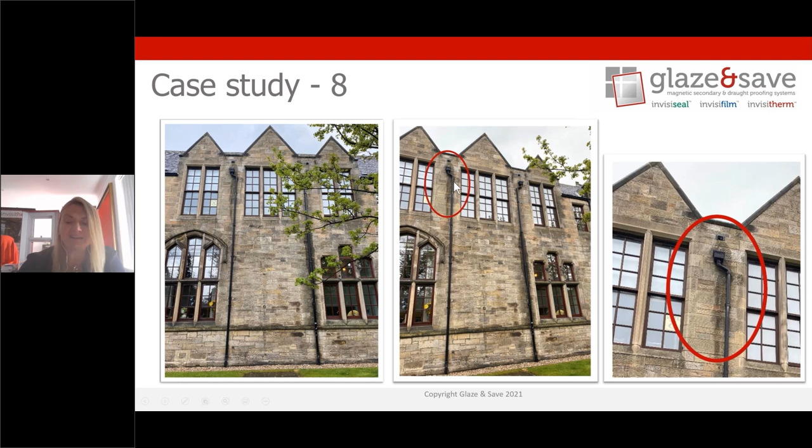So I went outside. First of all, you can clearly see that the water there is coming not into the gutter and actually soaking into the stone, and the camera picked that up straight away. Also, the second downpipe is leaking. It's blocked at the bottom and it's got plants growing out of it.

And then what's scary is that the pointing wasn't done, and with this water coming down and probably the wind blowing and the climate change is meaning that these windows are getting hit with a lot more moisture. And you can see this window in particular is already starting to feel the effects of the excess moisture, and the paint that was put on, what, 10 months ago, less than that, is already coming away. So this gentleman was absolutely shocked because he felt that he'd paid good money to have his building maintained.

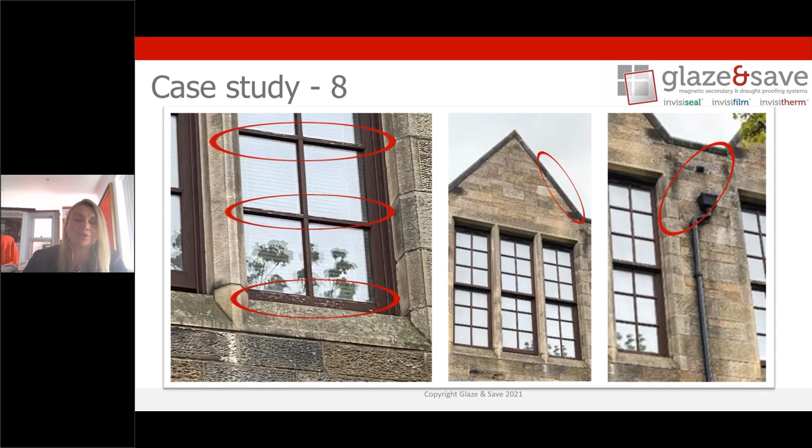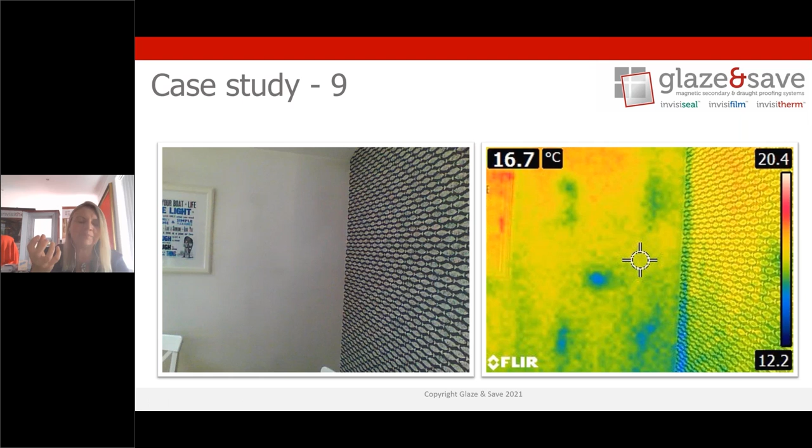Case study number 9, I just wanted to show, because of what Graham had said earlier, I've added this one in. You can see the stone building, rather than sandstone, it's a stone, but you can see that the actual moisture from the thermal camera is coming all the way through. So that's from previous sort of plant fixings. That's how much can actually be soaked into the building itself, just like Graham's diagram said. So when we're going out with our thermal survey, we're bringing to life exactly what's happening within the house and really engaging the clients with what's going on.

This home, again, was only purchased last year, and at no point was the homeowner told that all his downpipes were soakaways, that there was no drainage at all. And we found the whole base of the house to be terribly, terribly damp. And when we looked at the site inspection, as well as the soakaway, there has actually been tarmac put right along the street right next to the home. And it's meant that the moisture now is just running straight into the stone. It isn't able to soak into the ground as it would have done previously.

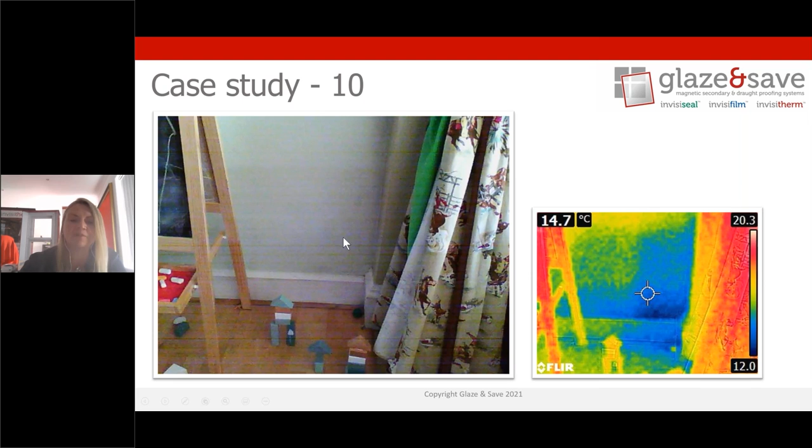Now, why is this, property owner? Is this ignorance of these major issues? I've been racking my brains, especially over the last year, as to why this is actually happening. So I'm glad that I'm having an audience today to put this to.

So when it's a newly bought property, they're confident of the sales report. Do you think that's why it is? Do you think it's concentrating on the internal aspects of the home first and not actually looking outside? So desperate to get the kitchens and the bathroom and the furnishings and things and the paint right?

Not sure. Relying on existing tradesmen to highlight and fix the issues. We outsource everything these days, from dog walking to ironing. Do we think that everybody that we would hire is then able to fix the problems for us?

Lack of understanding of tradesmen prepared to work on traditional buildings, or limited understanding of the climate change issues that we're now facing, and fast.

Timber preservation companies not advising correctly the source of the issue. I've done some journeying before I spoke today about this, and they just have it in very fine print that they say external landscaping should be considered. I've asked landscapers if they've ever really come across any of these reports, and they wouldn't have a clue on how to start. So there's definitely disconnections with everything.

Lots of roofers are fixing the gutters, but they're not looking at the blocked drains below. They're just quite happy to clear what is seen and not actually mentioning that there's other problems there.

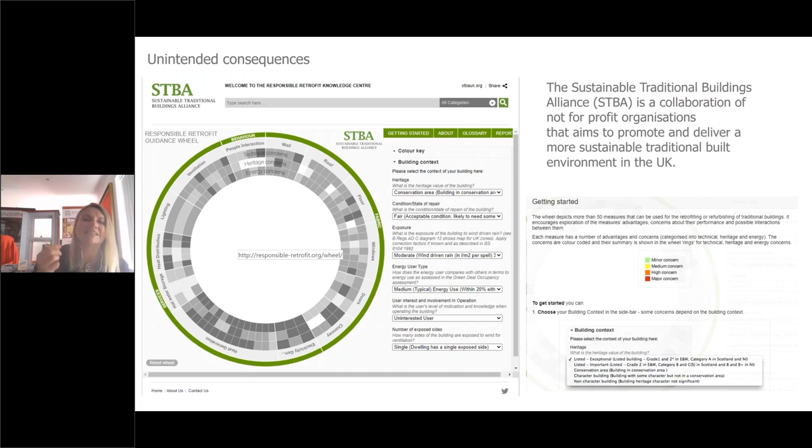We also point people to this website, which is the Sustainable Traditional Buildings Alliance. It's called a Retrofit Wheel, and it will alert you to any unintended consequences if you don't get the journey that you're going on for retrofitting in the right order and with the right products. Whilst it was written in 2013 and it's not been updated, it's still an extremely valuable tool.

Now, I wanted to end with these last 3 slides and talk about why I feel this is a really big issue. If we look at this slide from the Institute of Building Physics, you can see here that they've done a sort of test of a typical insulating product, and that's vapor permeable.

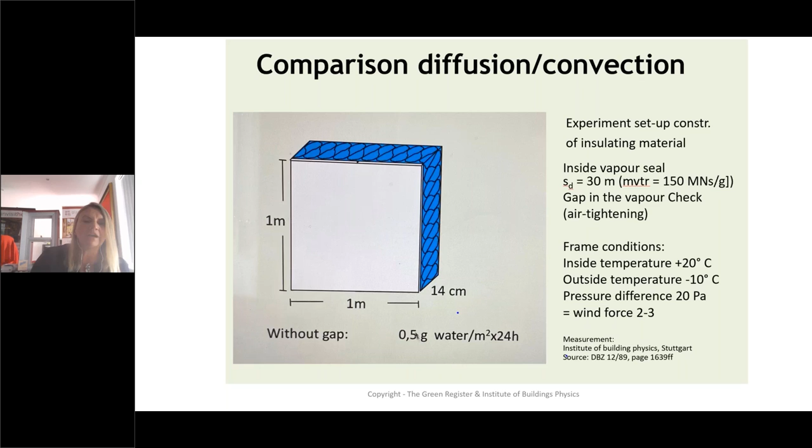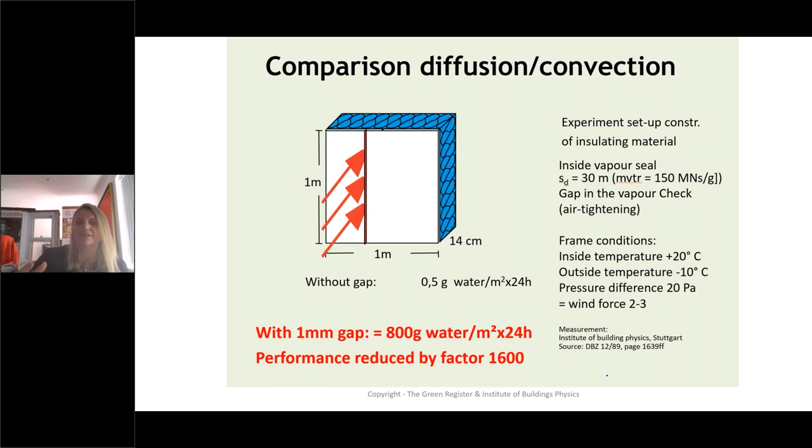And with no errors in the installation of it whatsoever, or no issues with the environment around it, it will draw in 0.5 of a gram of water. With 1 millimetre of a gap, it draws in 800 grams of water. So you can imagine if we don't get it right, what will happen when we do start insulating in buildings that are not watertight. So I'll leave you with this

quote from Gordon Nielsen. I heard him speak at an event towards the end of last year, and he said that in late 2020, research carried out in 2018 on the Scottish House Condition Survey estimated that only 27% of pre-1919 properties are wind and watertight. That's a staggering figure. Now, I would say it's near 90% from the surveys that we carry out. I'm not sure if we're stereotypical or not, but it is staggering.

And he really drove home that we need to repair before we insulate, and insulate before we generate. And that is the message that I'm leaving you with today. So thank you very much for listening.

Excellent. Thank you for that, Tanya. Really interesting. I know we'd spoken before the session today about some of the case studies you were going to show, but some of those were astounding, and the fact that they all just happened in the past 2.5 weeks as well is incredible. They did, yeah. That was why there's a lack of thermal images, because they don't really work at this time of year, so sorry about that.

No problem. Right, great. So what we're going to do now, before we go to the Q&A, we're just going to bring up another poll to give the panelists a quick chance to get a drink of water before your questions. And what we would like to see is your thoughts on what is the most important aspect of energy efficiency retrofit on pre-war buildings. So we're talking sort of before 1919 here. And is it the preservation of architectural features, lowest carbon dioxide emissions, reducing energy and fuel poverty, maintaining the use of the building, or using local materials and skills? So we'll leave that up for a few seconds and then get the feedback fairly quickly.

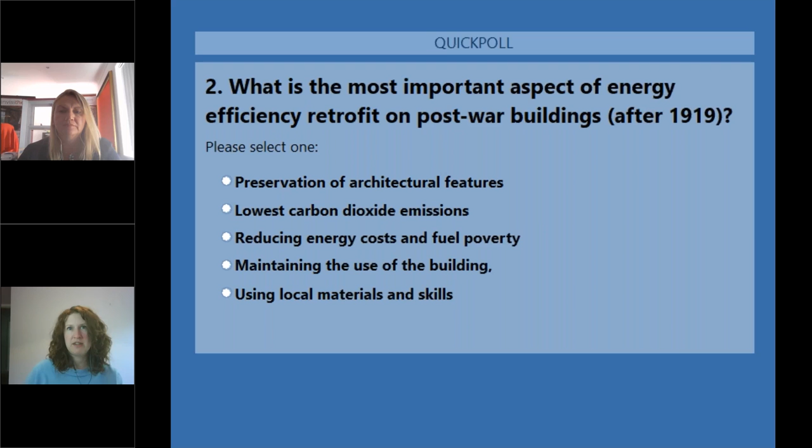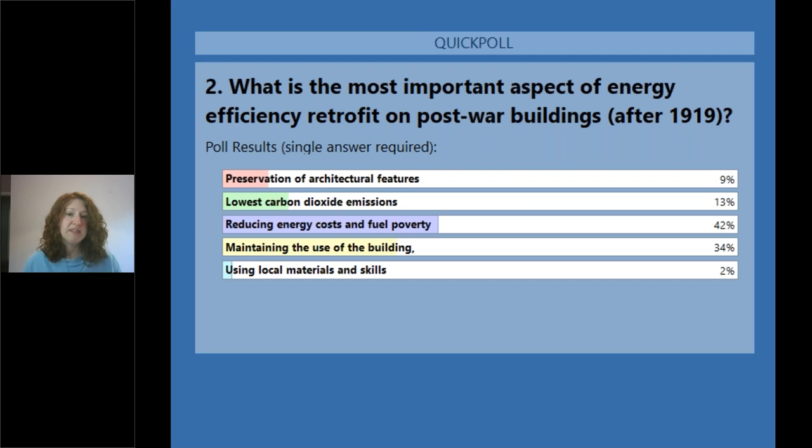And I've had some questions coming through as well for the panels. Right, so what we've got here, again, reducing energy costs and fuel poverty. It's a bit of a difference there from the first one, where preservation of architectural features was scoring much higher. And maintaining the use of the building, so high on that one as well. So thank you everyone for that. All right, could all the panelists put their cameras back on now, and we'll get to the Q&A.

But there's plenty of guidance in there you can have a read at. I'm not sure if I've answered your question. It's just you kind of know, I suppose. All right, great. No, thanks for that, Graham.

And the next question is from Stefan. Is the 28 million figure inclusive of new build housing currently designed to the minimum standards that will need to be retrofitted to achieve improved energy performance? And I think that was something I actually referenced in my introduction. So I've been desperately trying to look this up for you, Stefan, and I haven't got quite the answer yet. So if my other panelists don't know, then we'll come back to you. But yes, we are aware that there are some new buildings being built at the moment where the energy performance could be better and will not be sufficient for the goals.

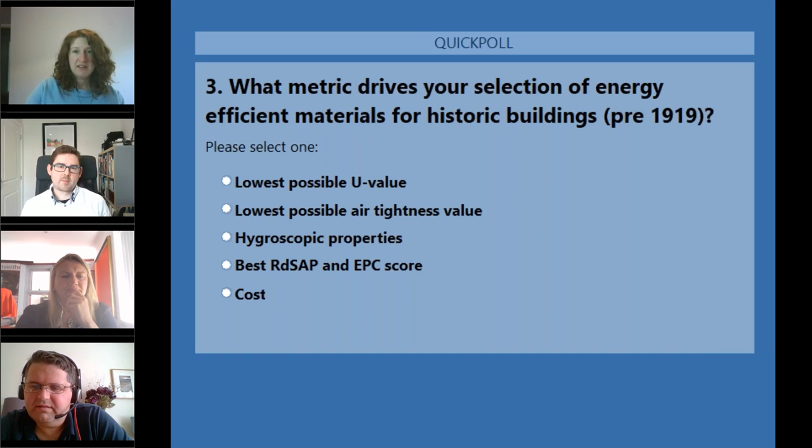So just to finish off, I think we've got one final poll coming up. Is that right, Danielle? Yeah. We just want to know what metric drives your selection of energy efficient materials for historic buildings, pre-1919. Is it the lowest possible U value, lowest possible air tightness value, hygroscopic properties, the best RdSAP and EPC score, or is it cost? So we'll get the figures up for that in a minute.

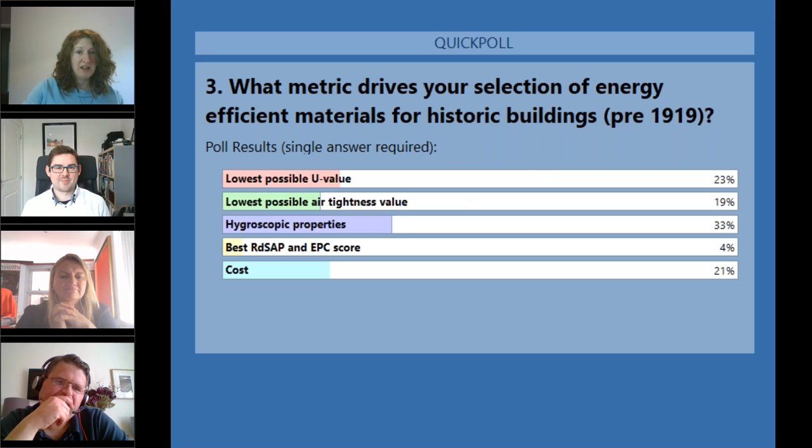Quite a spread there. That's interesting to see. Yeah, so hygroscopic properties doing very well there, as is lowest possible U value, and cost is obviously clearly a factor in that as well, as with most things.